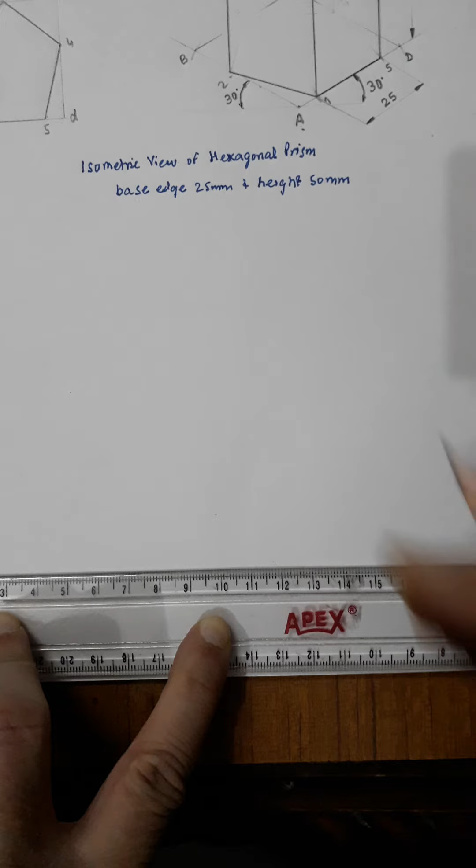Hello students, in this video I will discuss how to draw a hexagonal prism with base size 25 mm and height 50 mm. I will be drawing a hexagon first with a 25 mm edge.

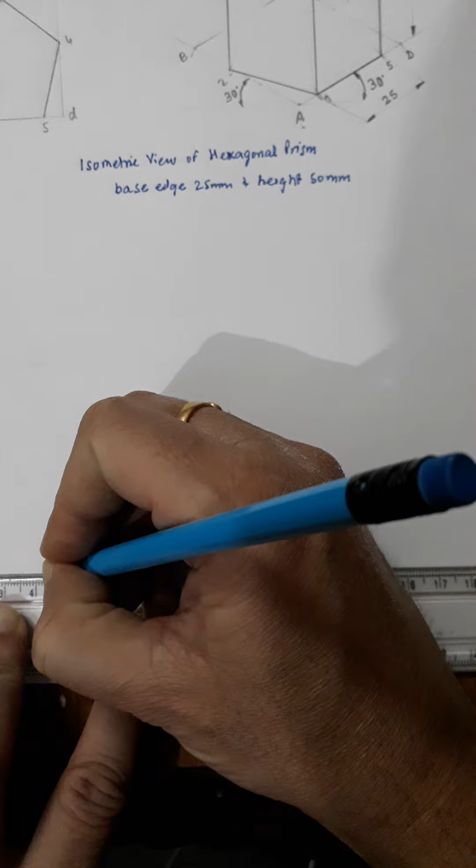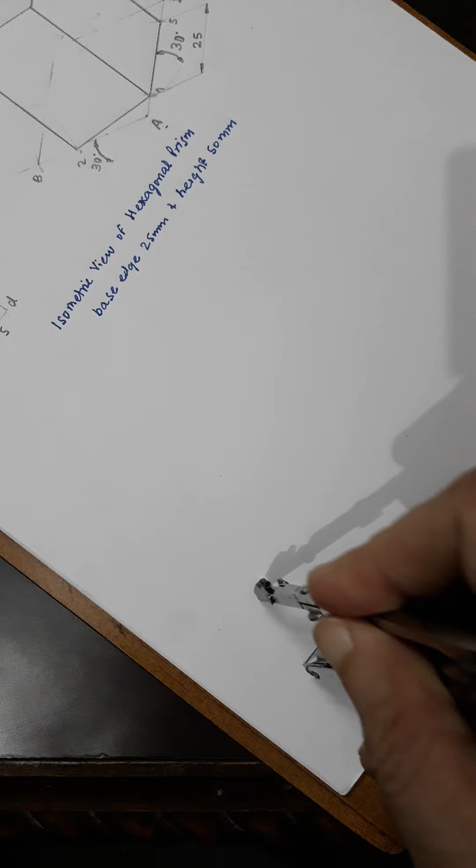I have drawn this 25 mm edge, you can check it. I will be drawing the hexagon using the circle method.

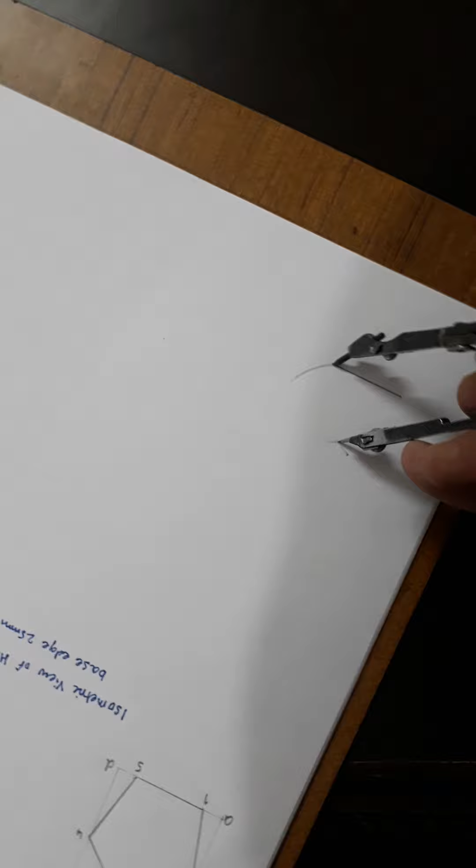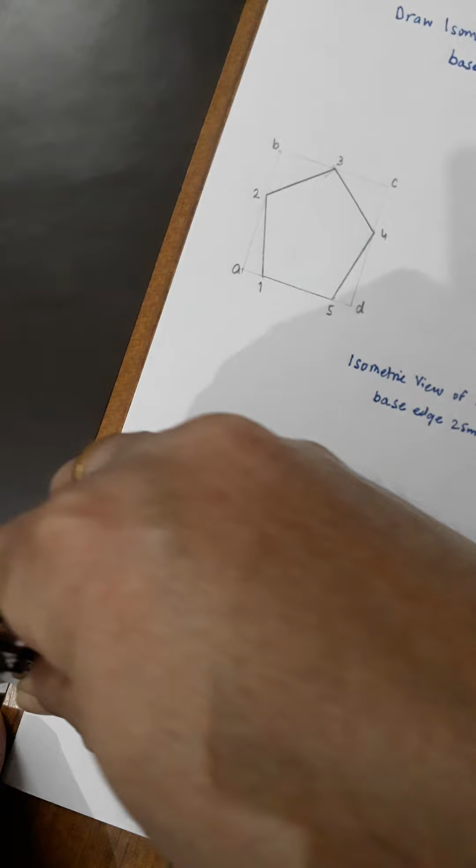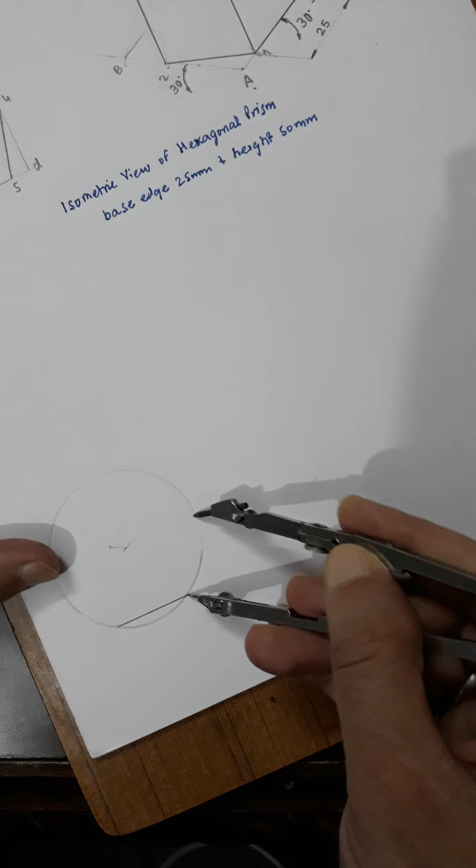Go to the center and draw the circle. Now mark these edges with the same compass setting, then join these cuts, it will be done 6 times. Now join these edges, and this will be a regular hexagon.

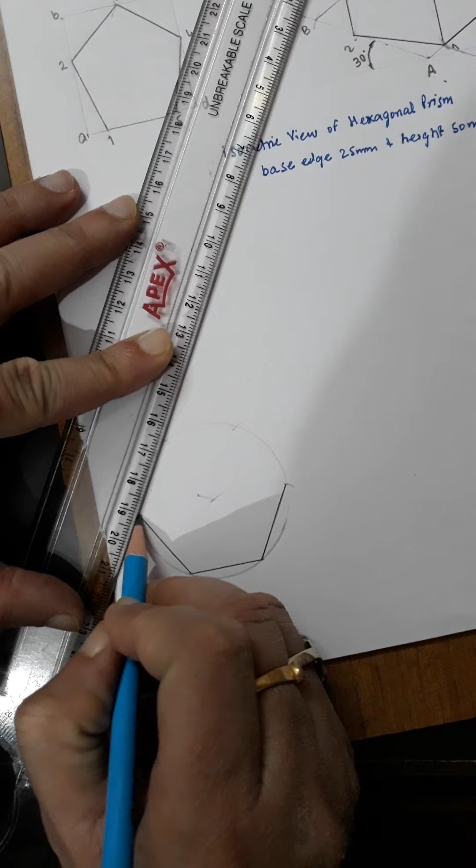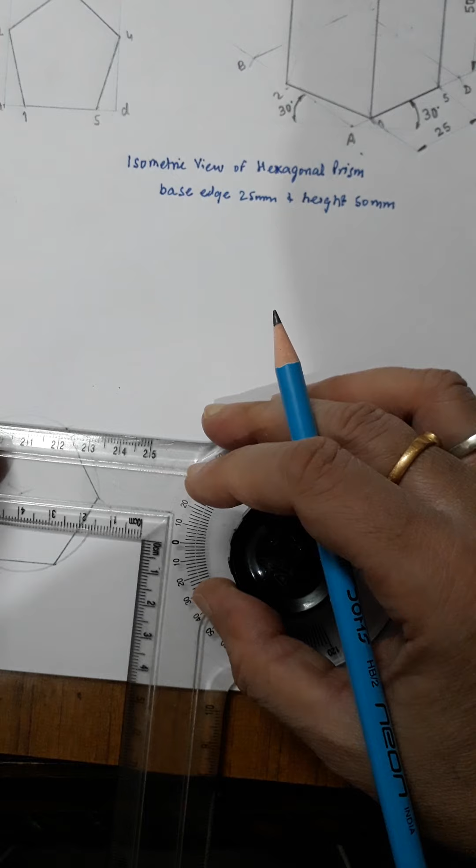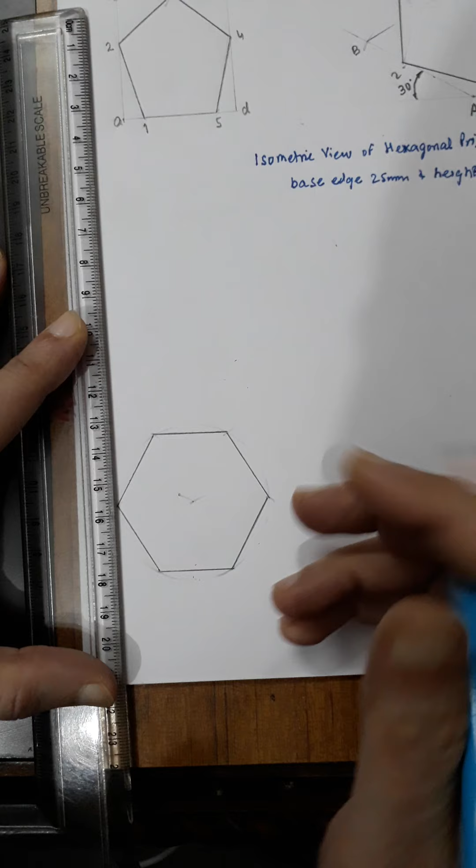So this is a regular hexagon. Now I will make the outside rectangle by drawing the vertical and horizontal lines outside it.

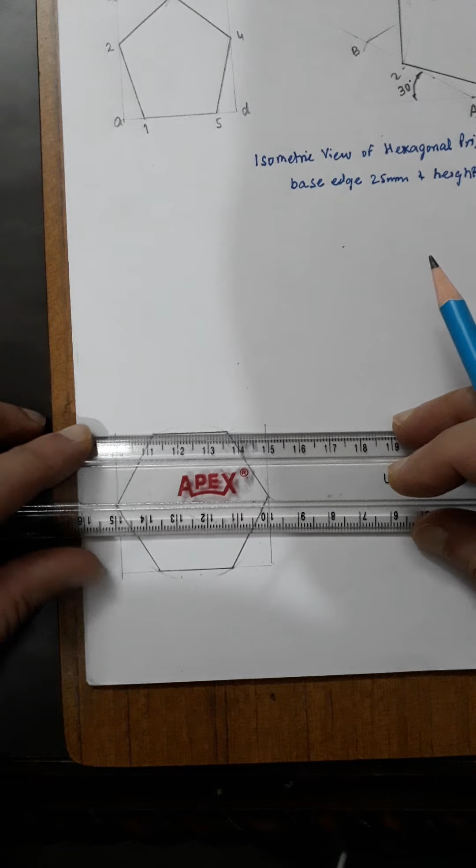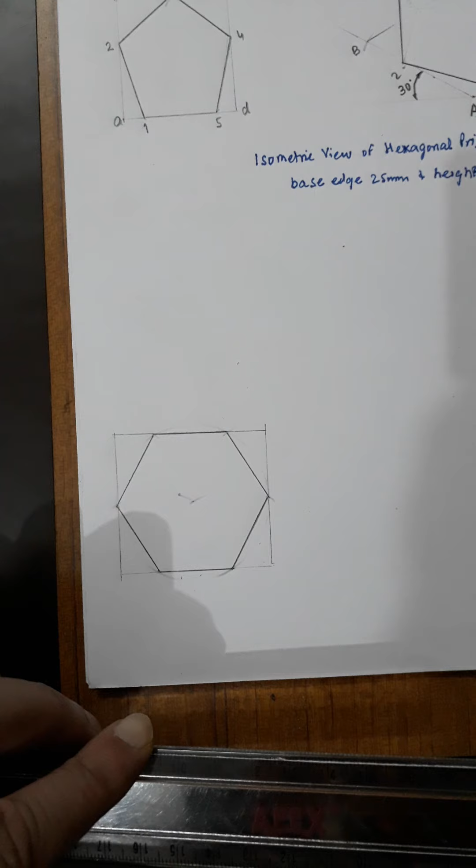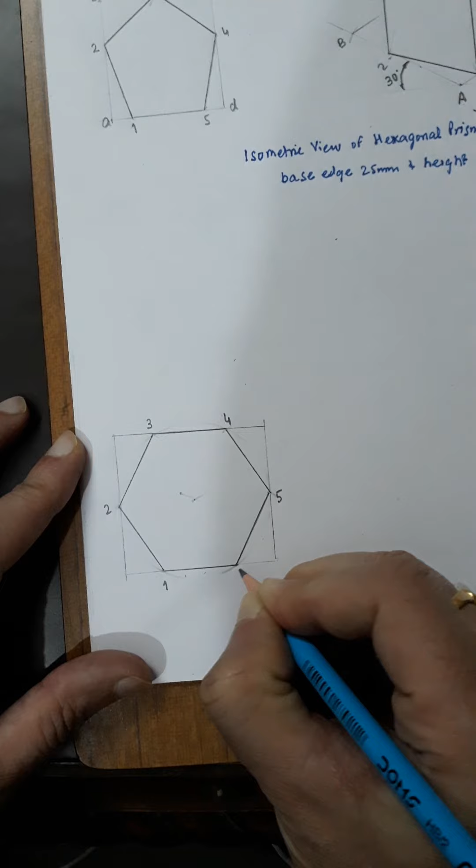So now this is complete. Outside rectangle is okay. Now I'll be drawing its isometric view. Before that, you can name the hexagon points 1, 2, 3, 4, 5, and 6, and the outside rectangle corners A, B, C, and D. Now I'll be making the isometric.

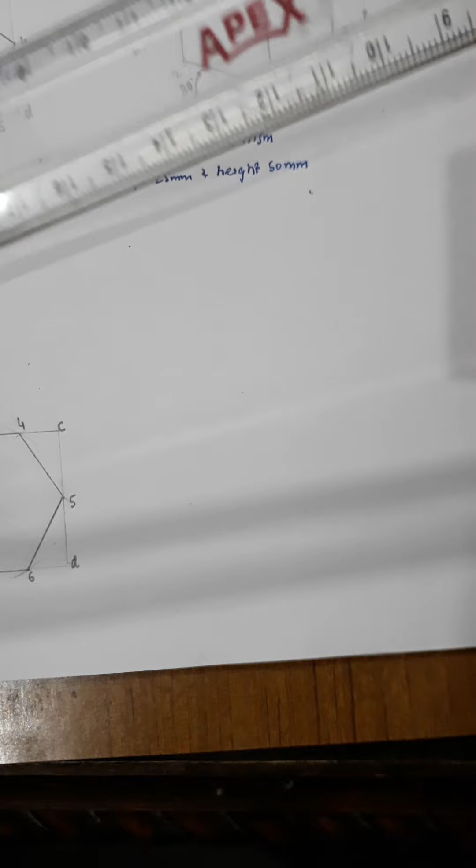Draw any suitable reference line. So this is the reference line. You can mark any point A on this.

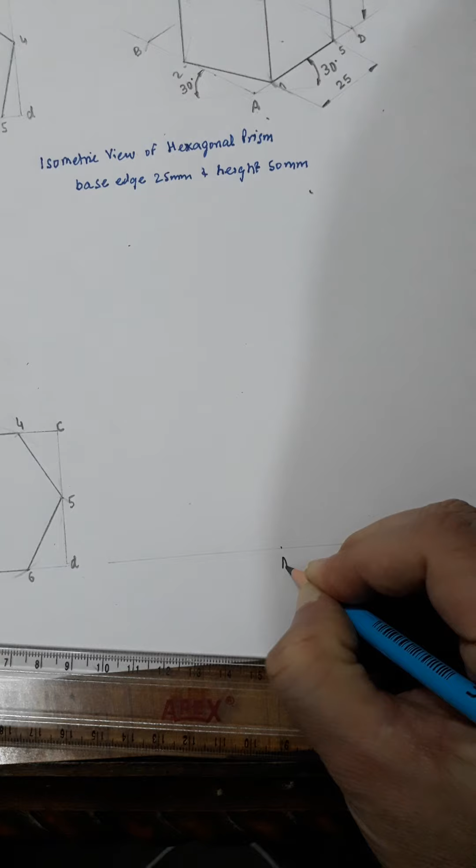Then you have to draw two 30-degree lines on both sides of this point. I measured 30 degrees on one side and 30 degrees on the other side.

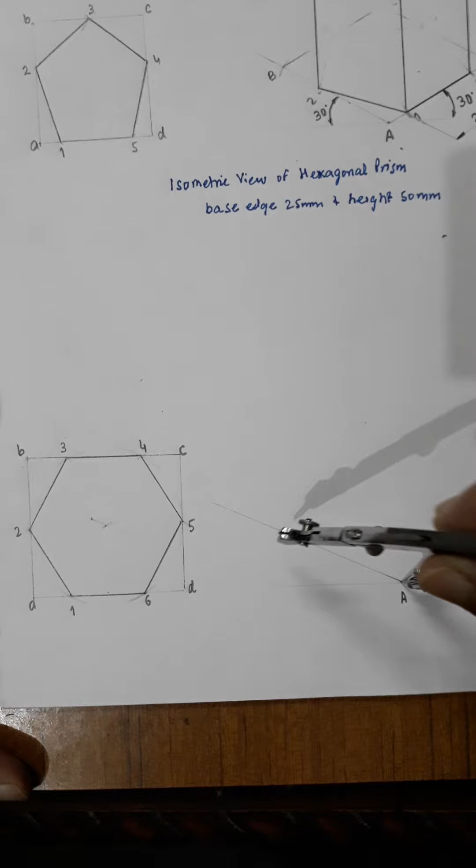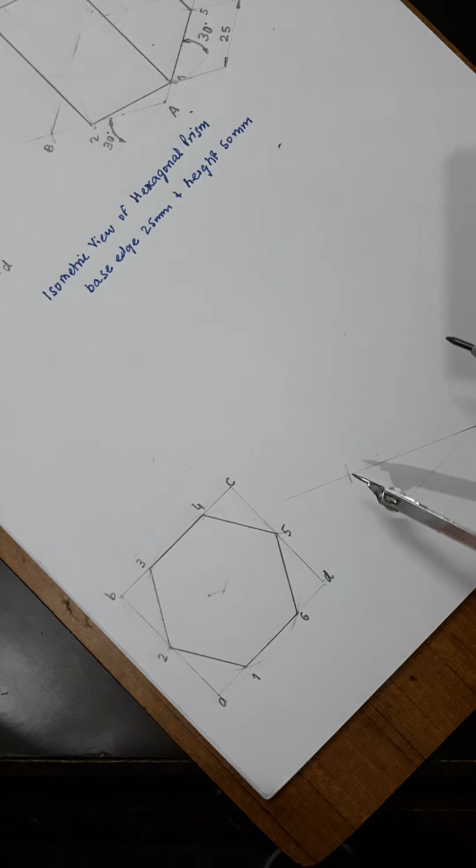Now you have to take the distances AB and AD from the original drawing and transfer them onto this isometric using the compass, no need to measure. So it will be a rectangle, and in the isometric it will become a parallelogram.

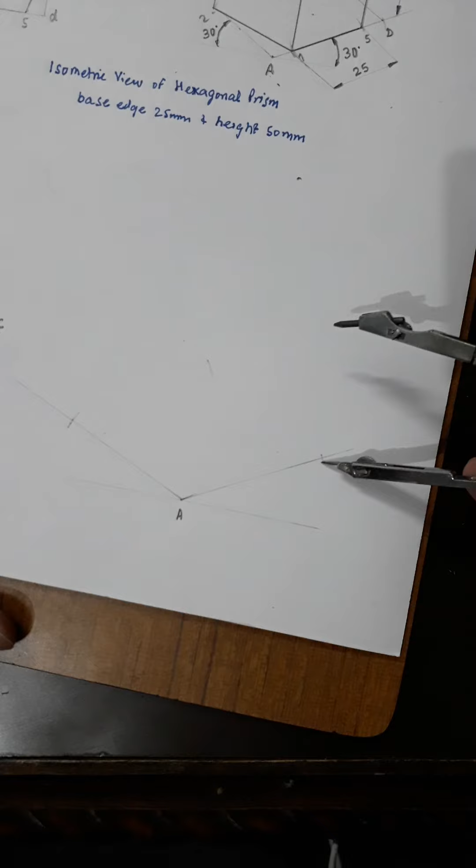Now you can join this, and now join this. Now you have to find out the points.

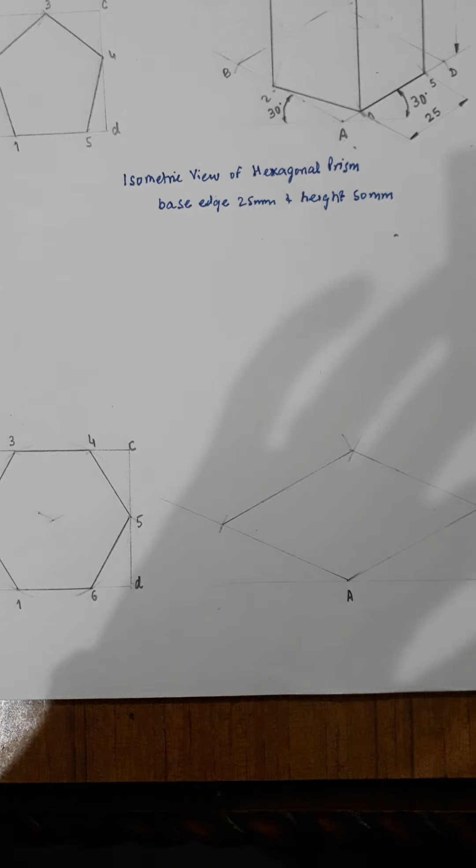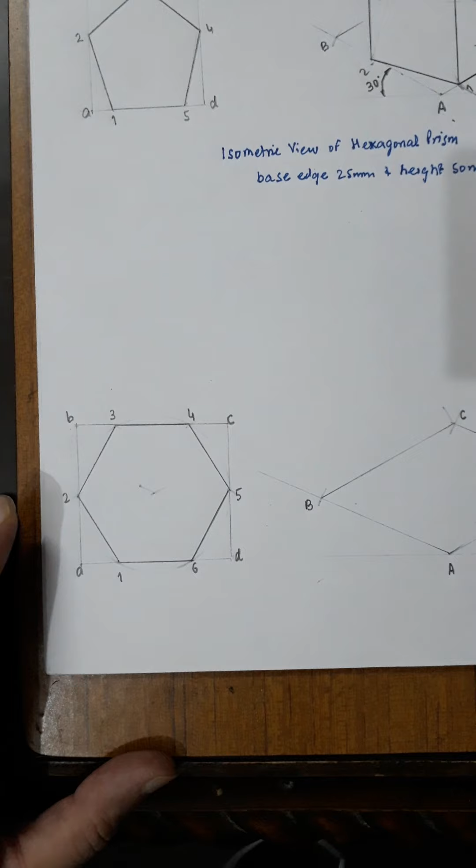Mark it A, B, C, D, and find out points 1, 2, 3, 4, 5, 6. Here point 2 lies between A and B, you can check that. Similarly, point 5 will be lying between C and D.

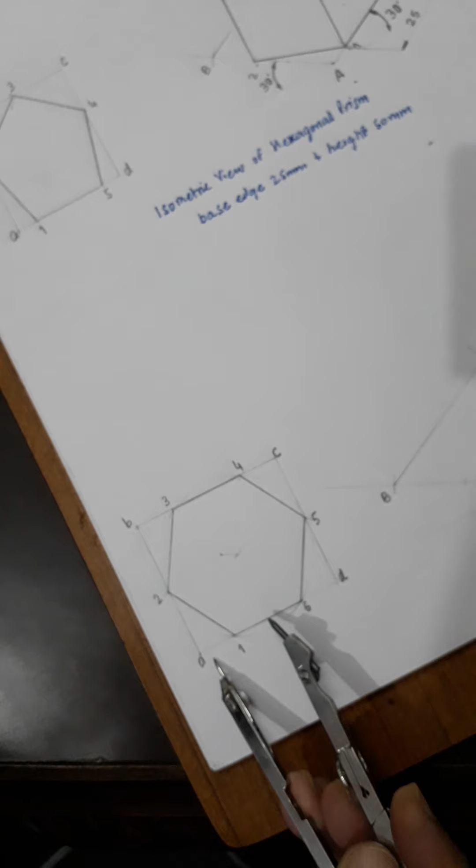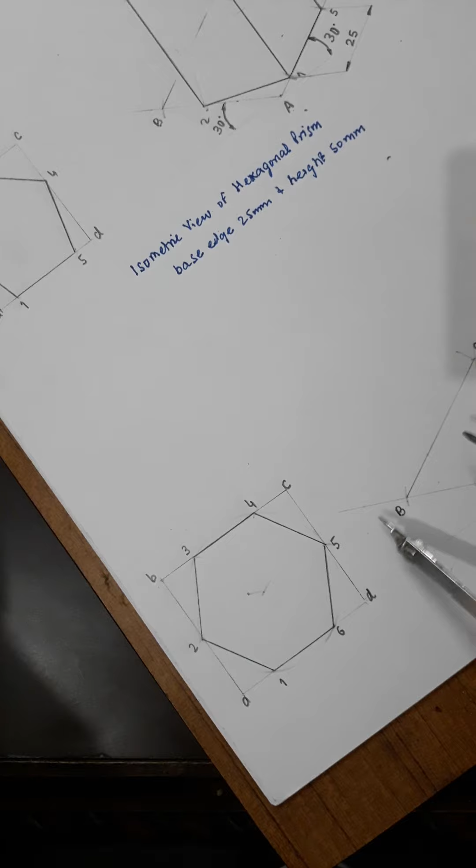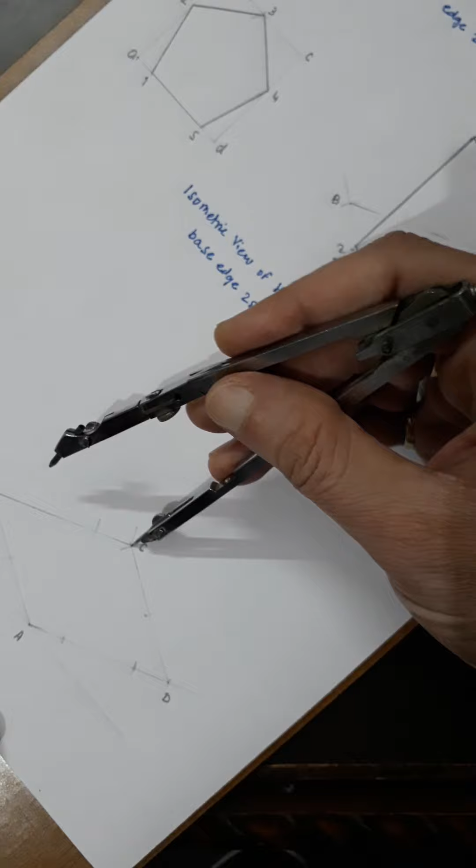Now you have marked it. After marking, you need to join these points. I have marked all the points, now I'll be making it.

First, you have to make thin lines. Always draw thin lines, otherwise sometimes you have to erase these lines as well. Now join these points.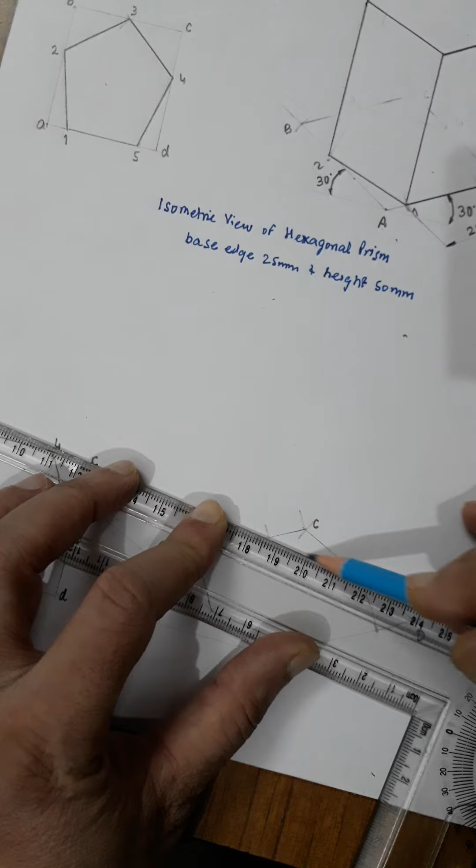So this is the hexagonal base. This is 2, 3, 4, 5, 6 and 1.

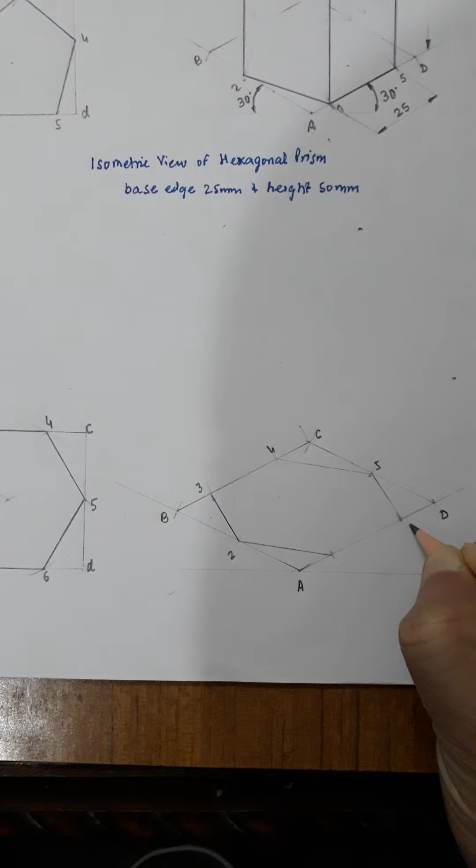Now you have to take the height. The height given is 50 mm. You need to draw 50 mm vertical lines through each of these 6 points. So I'll be drawing from 1, 2, 3, 4, 5, each at 50 mm.

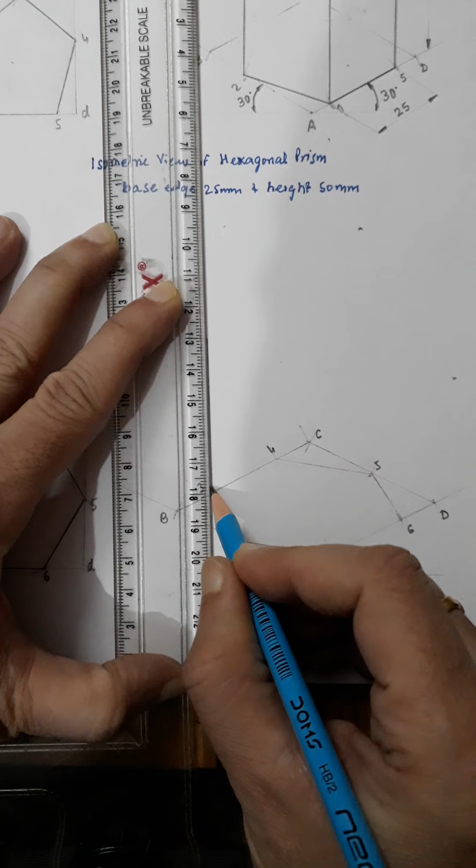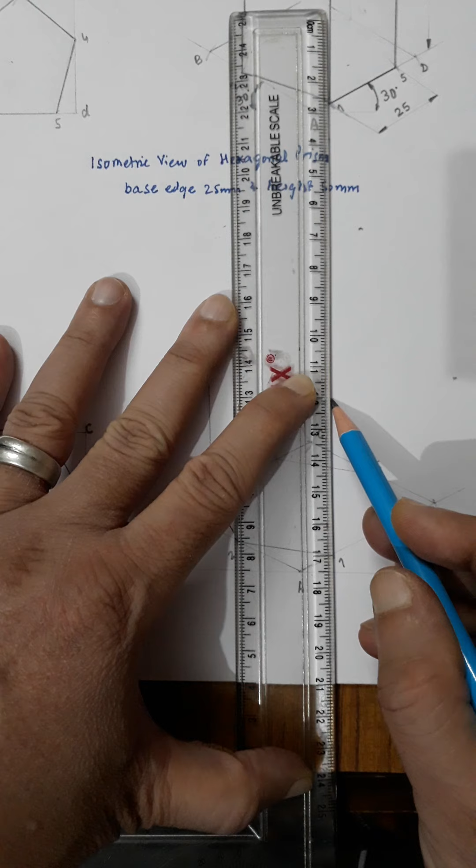Similarly, from this edge I'm drawing the vertical edges only. From here, I'm taking 50 mm, and from all the edges you can draw the 50 mm height.

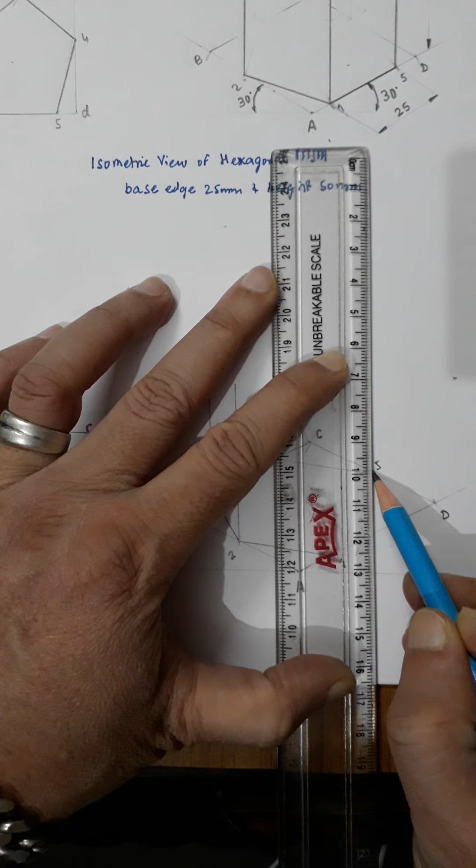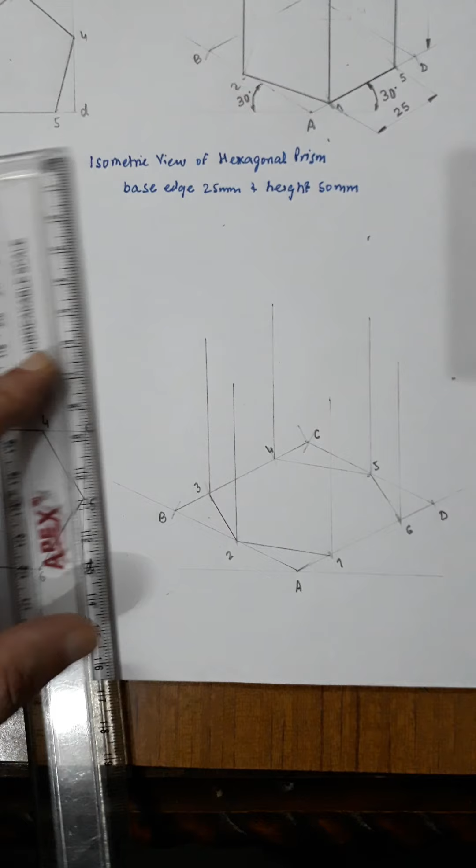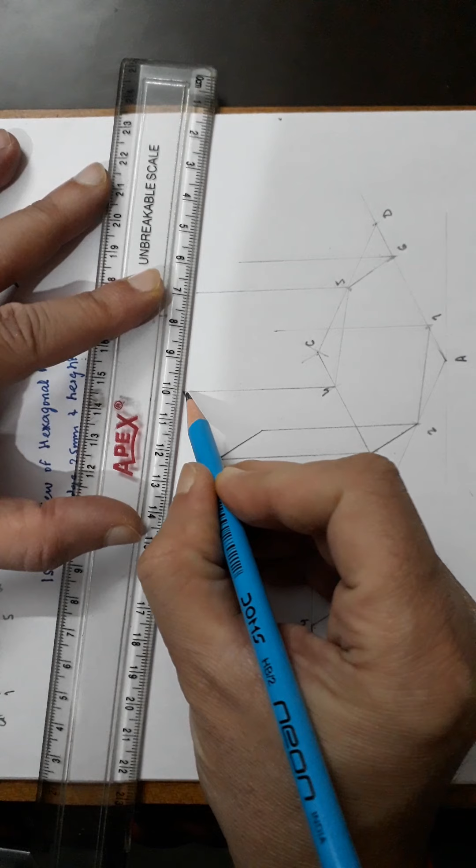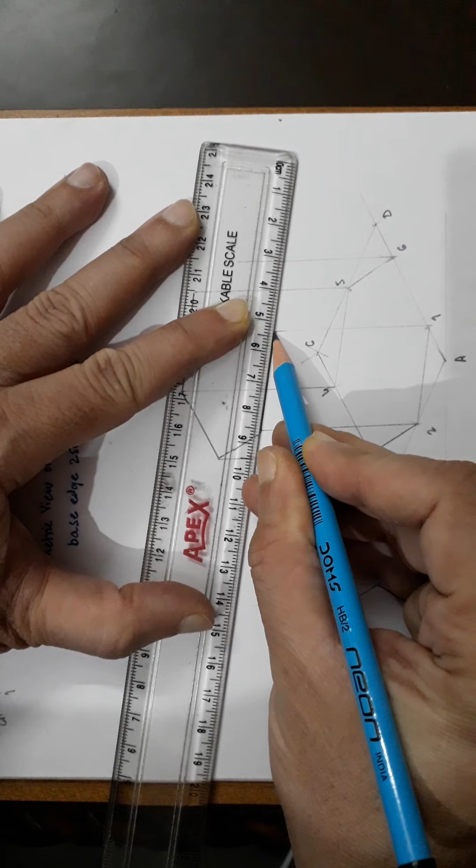Now you can join these top edges. I'll be joining the tops of these edges so that the upper hexagon becomes visible throughout. Again I am joining this, and now all the edges have been joined.

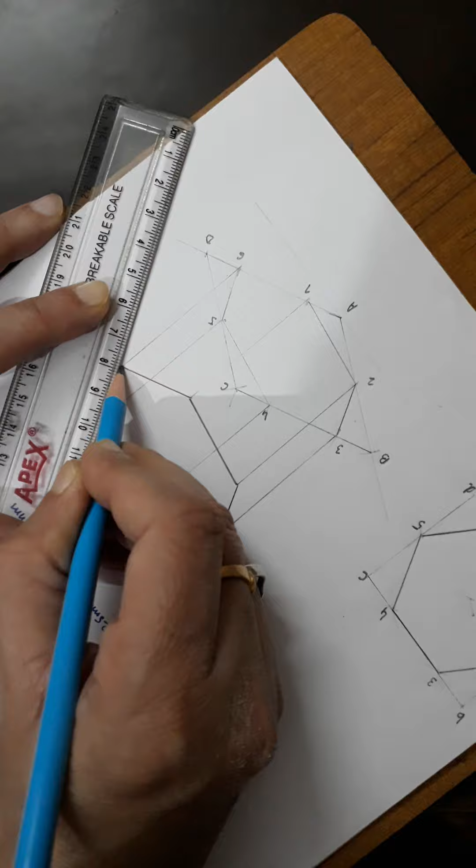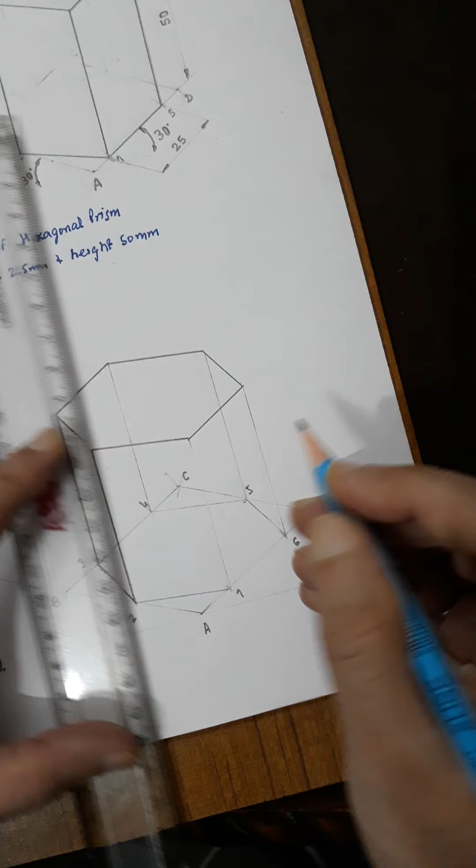Now you can make it thick lines. Whichever portion is visible, you have to make it thick. So this will be thick, this is already thick, this is also a thick line, this is thick too, because whatever is visible you have to make thick. This line will also be thick.

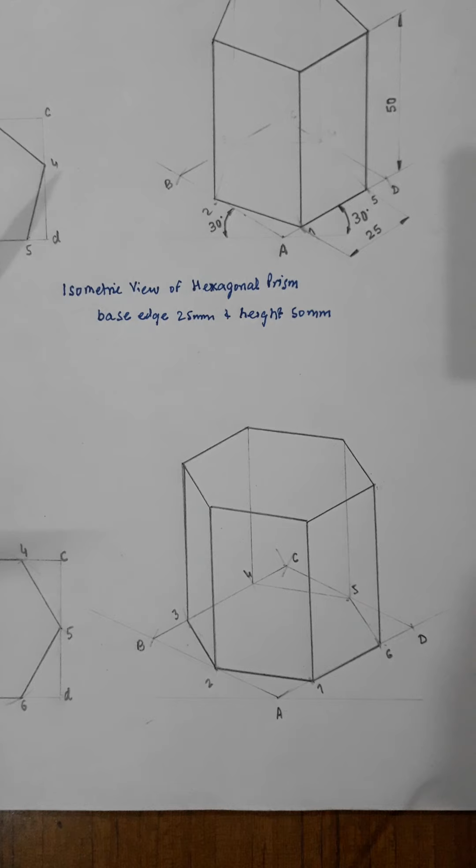Now it is complete. You can erase any unnecessary lines. Now I have erased these unnecessary lines, so hidden lines will not be there.

Now I'll be doing the dimensioning. I have done the dimensioning, you can check it, done as per the aligned system. I hope you got it - this is the isometric view of the hexagonal prism.